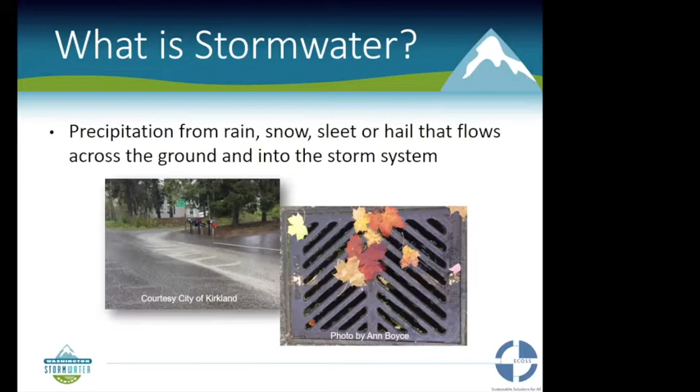First of all, it's really important to understand what stormwater is. It's rain, snow, hail, sleet, whatever, and after it melts, it goes across the ground and into the storm system. Why is that a problem? Well, as it flows across the ground, it picks up pollutants and mostly goes untreated into storm systems, eventually ending up in local water bodies, your local lakes, creeks, rivers, and eventually Puget Sound or the ocean, depending where you're at.

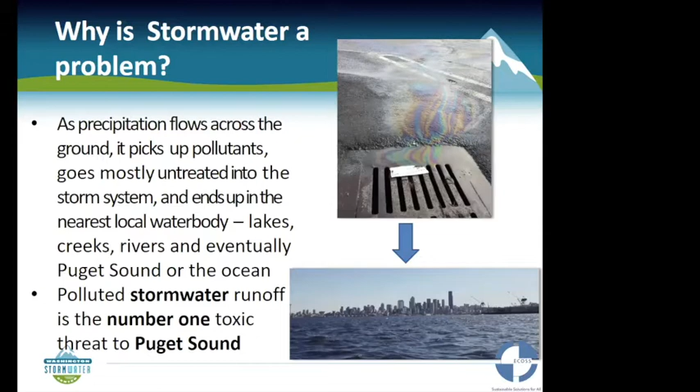Stormwater pollution is the number one toxic threat to Puget Sound, and that's why it's important that you manage your stormwater pollution. In 1972, the Clean Water Act was established to manage stormwater quality and quantity.

You also have issues such as galvanized surfaces, which have zinc in them. We'll talk about that a bit later. And also vehicle and equipment fluids and tires. WSU, through the Washington Stormwater Center, is actually finding out that a high percentage of chemicals in our stormwater come from tires. They're proprietary, so we don't know exactly what a lot of them are, but it is causing major problems for the health of our waterways.

Stormwater is not process water. Process water is things like washing down equipment, washing off fruit or vegetables, those kinds of things. If you have any processed water, that should not be commingling with your stormwater. Wastewater does not either - that is usually directly connected to your sewer system and is treated at treatment plants. And it is not groundwater. So only water that originates as precipitation is what stormwater is.

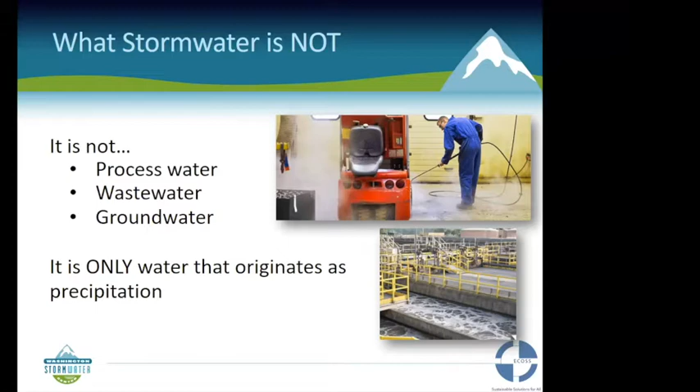Just to give you an example, there's two different systems. There's the municipal stormwater, separate storm and sewer systems, where everything from your homes, from your business, goes to a treatment plant and gets treated. Everything from roadways, parking lots, local fields, your home, your yard, goes into our local storm system, which goes out into our local waterways.

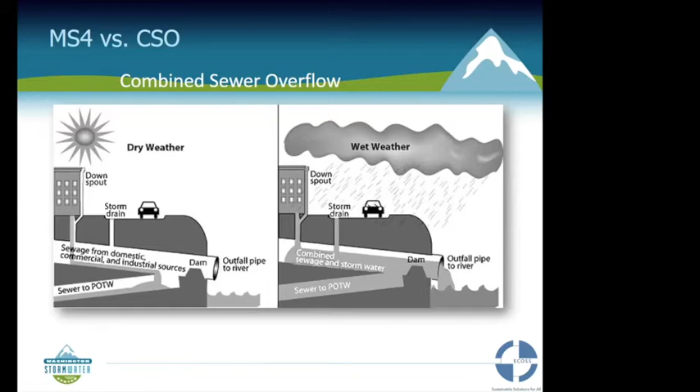There are places in the Seattle area, and some older cities, that have a connected system, called the combined sewer overflow system. Everything from businesses and homes goes to treatment, and the storm system is connected to that treatment also. But when we have large storms like we do these days, it can cause an overflow, which can go out into our local waterways, causing untreated sewage as well as stormwater to impact the quality of our local waterways.

I'm going to show you a real quick video that explains a bit more about stormwater.

Why is stormwater runoff a problem? On the one hand, it's just water, right? But in an urban environment, stormwater runoff is a problem because this is not a forest. This is.

Fall brings rain here. It falls from the sky, melts from the mountains, and runs through our communities. Trees, people, and salmon, from the peaks of the mountains to the depths of Puget Sound, we're all connected by the water that runs through this magical place. When salmon return from the ocean, they bring back nutrients that feed the river and forest ecosystems. From mayflies and trout to eagles and bears, even the trees feed on salmon. They also feed us.

When we built our cities, we weren't thinking about salmon. And when we covered our cities with concrete and asphalt, the rain could no longer soak down into the forest floor. Instead, the rain picks up toxic pollution from the concrete and asphalt and flushes it right into fish habitat. You could see particulates like sand in stormwater runoff. What you can't see are toxics like fossil fuels, plastics, pesticides, metals, and bacteria.

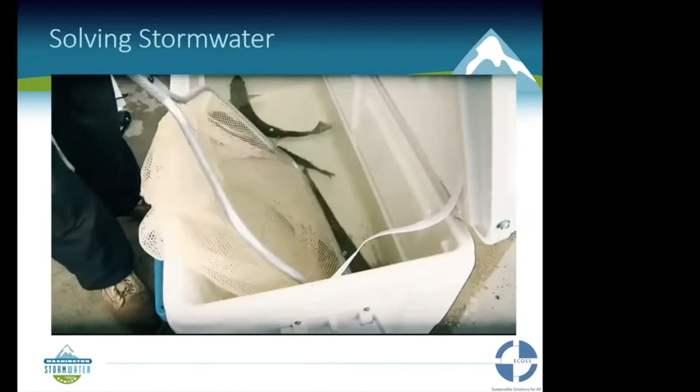Part of our work has been to see how salmon are affected by urban runoff. Coho salmon in particular spend much of their lives in fresh water compared to other types of salmon, and they need cool, clean water to thrive.

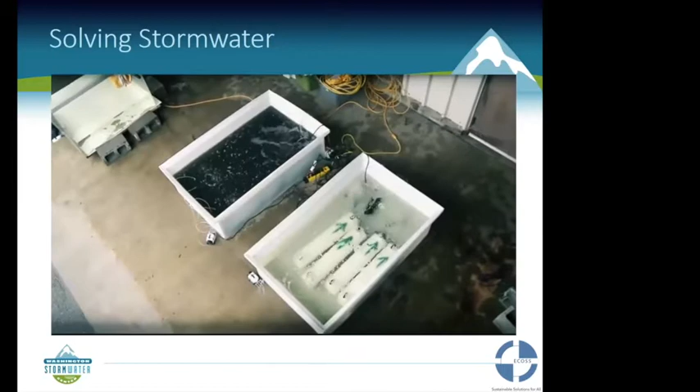In a very simple experiment, we collected runoff from a busy highway in Seattle. Some salmon were placed in clean well water. Others were placed in the collected stormwater runoff. 100% of the salmon in the stormwater died. The fish in the clean water all lived.

So you're seeing 60, 70, 80% of the fish entering that system to spawn are dying before they get a chance to spawn. A normal rate of pre-spawn mortality would be like 1% of the population might die before they get a chance to spawn.

We used to think physical habitat restoration was what salmon needed to recover. We now know it's much more complex than that. Controlling sources of toxic chemical runoff into our urban creeks is crucial to the solution.

After a grueling journey back to their native stream to spawn, toxic runoff causes the salmon to become slow and disoriented. They lose their ability to swim and eventually expire, the females still full of eggs.

And for the few in the next generation that manage to survive, we see effects on the heart, and inside that bubble under the fish is where the heart is developing. Stormwater runoff will cause swelling in that area. That's pericardial edema. And edema happens in humans too, and it tends to be associated with heart failure.

Coho salmon have returned to the Pacific Northwest to spawn for 6 million years. Given the impacts of urban runoff, is there anything we can do to keep them coming back to developed areas?

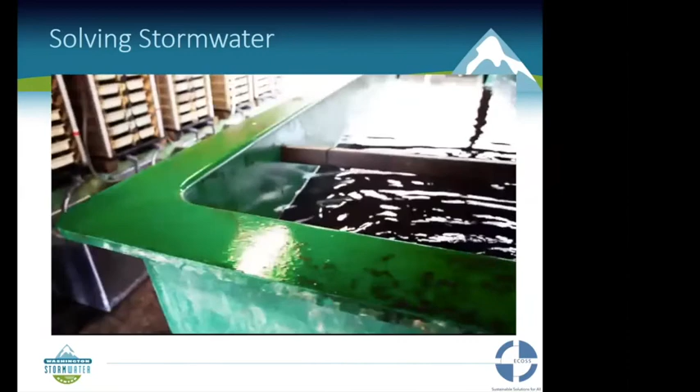The answer is yes. Our research team passed stormwater runoff through a simple filtration system made of sand and compost. We then tested whether the water was still toxic to salmon. 100% of the coho salmon tested in the filtered water survived, every time.

A soil system like the one we used in our experiments is an example of green infrastructure. Using nature as a filter, diverting runoff and using absorbent soils in this way is not the norm, but it is slowly gaining popularity in cities, and we are showing that it can work.

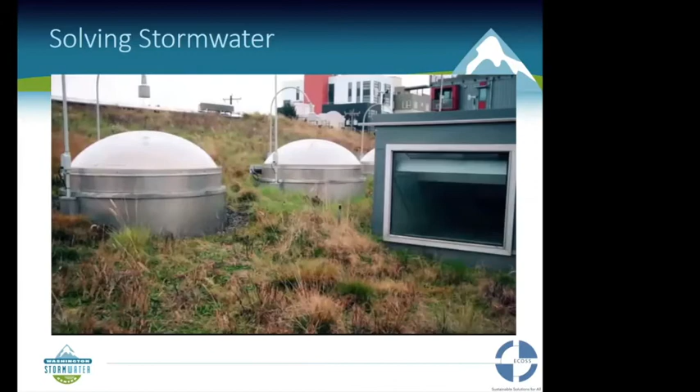In urban areas, green infrastructure like rain gardens and green roofs can act as filtration systems, removing toxic pollution from stormwater runoff, preventing it from reaching streams. This is a message I've been speaking about for some time. No one anticipated the intense toxic response that urban stormwater would have on coho salmon, nor how simple it could be to remove that toxicity.

Really, it's just helping our hard urban landscape act more like the forest floor, letting the rainwater soak into the soil. It's not like we can tear down all of our cities and return to the forest that was there previously, but I think there's a lot we can do. We can go a long way towards helping these systems act more like the forest.

These animals are treasures to us here. Economically, culturally, and ecologically, they are critical. But it takes more than will alone. It takes action. We can't afford to lose these species. Their well-being is an indicator of our own well-being as a species.

We can't go back, but we can do what must be done now to go forward.

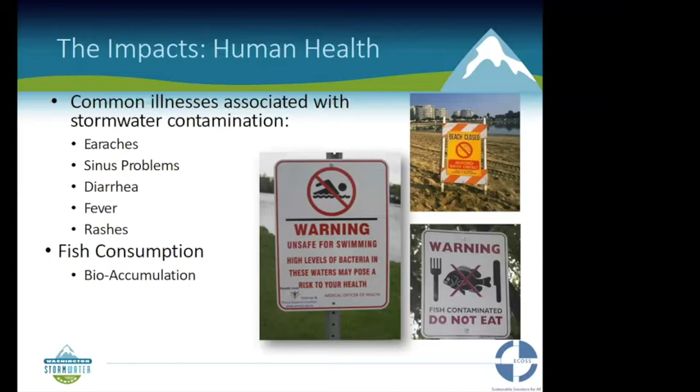It also impacts the economy. Municipalities are having to clean out storm lines and storm drains. They have to pay for public outreach and education and training. They also have to deal with remediation and habitat projects.

As construction companies and developers develop the land, there's stricter regulations dealing with new development, and there's also retrofitting costs for existing facilities. A lot of low impact development like rain gardens are necessary.

As Jen was talking about, there's a high incidence of pre-spawn mortality in urban streams. There are some streams that have 90 to 95% die off before spawning. So that's a huge impact.

It also impacts drinking water. It impacts recreational water use. And it also, as I mentioned earlier, contaminates shellfish.

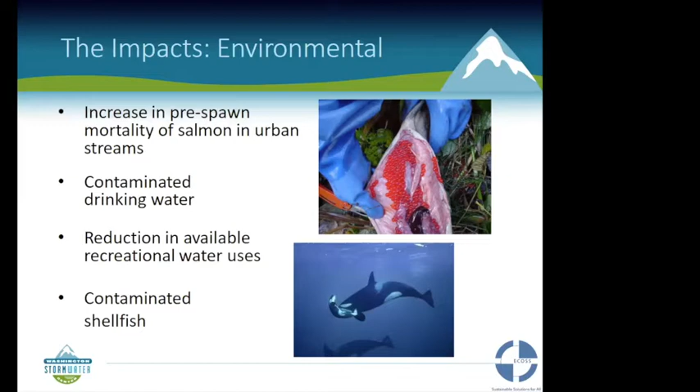And as you're probably aware, it also impacts industries such as yourselves. Stormwater pollution was only recognized recently as a problem, and that's why as we go through...

In 2005, the issues were oily sheen, pH, temperature, and gradually we've added different metals, and we've now started adding PCBs and other things that impact.

So more facilities are required to have structural or treatment BMPs to address that, which impacts your pocketbook. You've also got a lot of legacy pollutants from historical industry, and that is needing to be cleaned up as well. So it impacts your financial bottom line.

So that's the end of the stormwater section. Are there any questions? There aren't any questions. Okay.

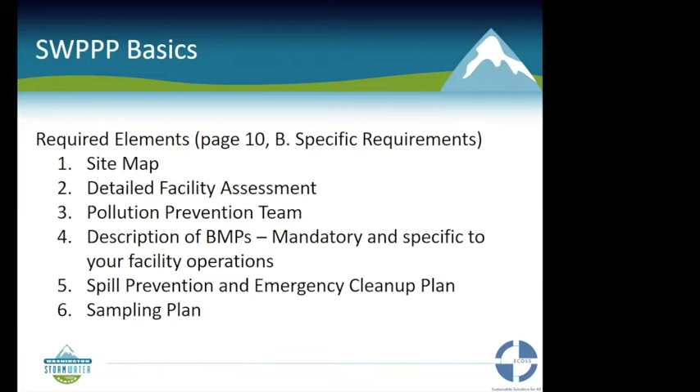So I just want to reiterate that these are the basic building blocks, but your facility is unique. So when you are going through these exercises, please think about your own facility and how you might apply what you're learning today to your own facility.

So what is your stormwater pollution prevention plan? We like to have lots of acronyms, so we call it a SWPPP. It establishes your stormwater management program. It's the basic backbone of your stormwater management permit compliance. It's a tool to help you meet and maintain permit compliance. One of the things we need to keep in mind is that it's a living document, and it has to be kept up to date with any changes or updates to the required elements.

Department of Ecology has a great SWPPP template, and it's a great place to start. It's part of the package that we'll be sending out the link for after the webinar. But as you go through it, you have to make sure that what the permit says is implemented, or change it to be more site specific. Remember, your SWPPP has to be very specific to your facility. Failure to develop and maintain your SWPPP in accordance with the permit is a permit violation, so you need to remember that.

All right, so we're going to talk about the site map and the elements that go into the site map. Please keep this in mind for when we have that exercise this afternoon.

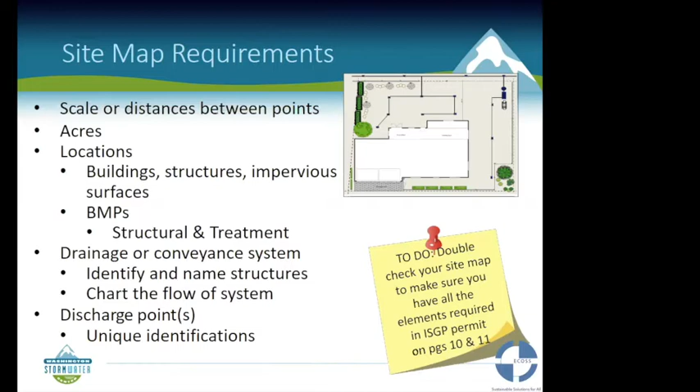Let's talk a little bit more about your drainage and conveyance. You want to locate inlets and outfalls—all your catch basins, all your downspouts, surface discharge. Are your downspouts a surface discharge, or are they piped directly into the stormwater system? Any area where stormwater will infiltrate, you need to mark that. Determine the location of your outfalls and where runoff and run-on might affect your property—anywhere your stormwater leaves your site, but also where your neighbor's stormwater might come onto your facility. You need to know, in a rain event, the surface stormwater flow direction and how it flows, and the location of surface waters in the vicinity. So if you have a wetland next door, or a river or creek nearby, you need to mark those as well.

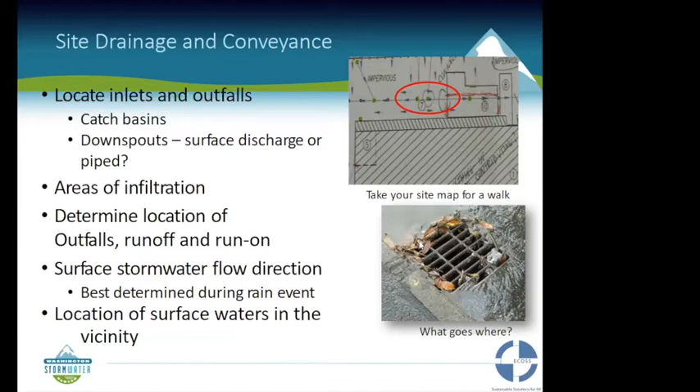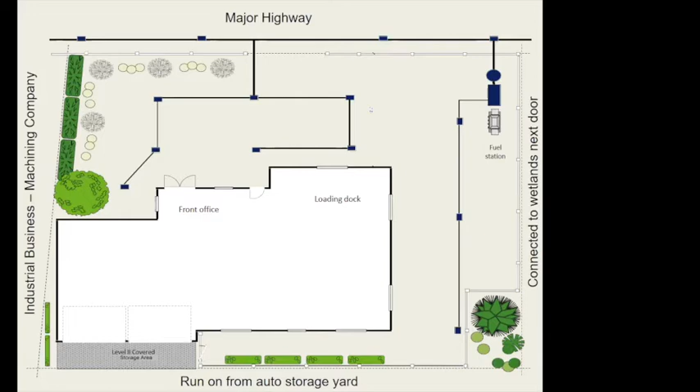Okay, so you note the distances, so the distances from the buildings, etc., and make sure that those distances are accurate. Go ahead and go to the next one.

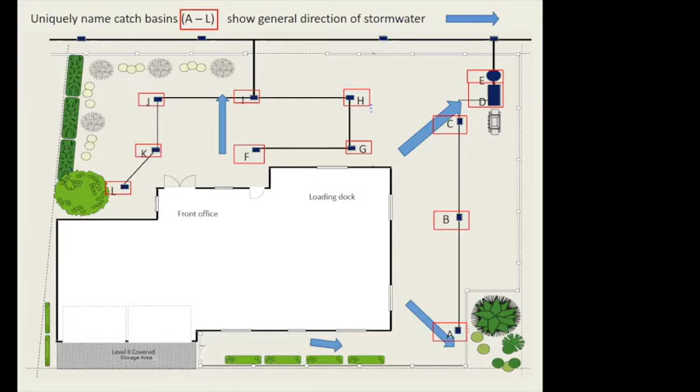You want to show the general direction of your stormwater flow. As you can see in this, the blue arrows are showing where the stormwater is flowing. And if you have some problems, like it looks like some of the flow may be in the lower right corner, maybe bypassing that catch basin and flowing into the wetland, you need to make sure that you berm that area to make sure you're not affecting that wetland.

So the other things you need to identify, not only those pipes and catch basins, but any sheet flow and any run-on areas of concern that may have pollution sources other than just stormwater, like the fueling station, and where that outflow is.

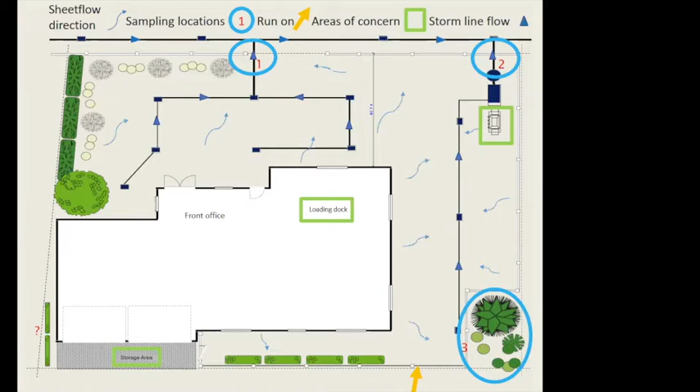Show where your stormwater leaves your property. We talked a little bit about this. If your stormwater is leaving your property inappropriately and affecting other facilities, you need to be aware of that. Making sure that it's not going into inappropriate places like the wetland, that's all important. It needs to be on your site map as well.

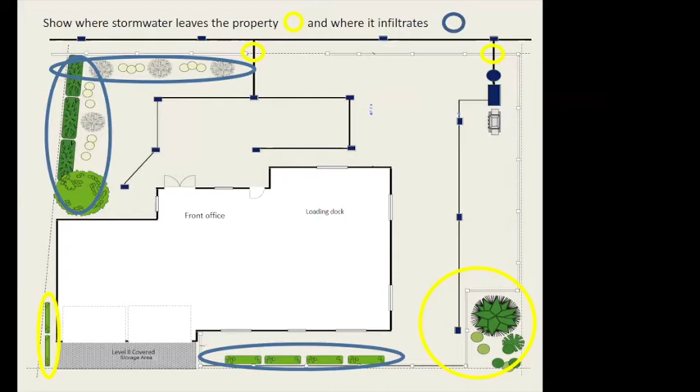So we talked about the site map. Please think about your facility when we go through the facility assessment.

This is required element 2 of your SWPPP, and the facility assessment is a description of your facility and your industrial activities. So what you'll want to do is take an inventory of facility activities, all of the equipment and materials that could cause you to have pollution problems.

So anything that's a source of pollutant, you want to note those and potentially, if you can, eliminate those. But you want to make sure that your facility is thoroughly inspected so you know where those areas of pollution runoff might be a problem.

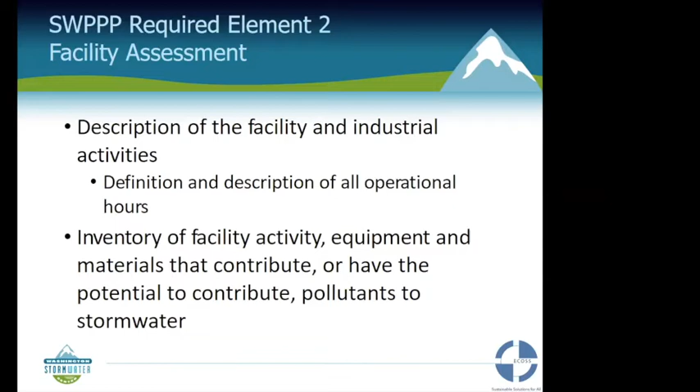So you assess your facility for sources of pollution. Sometimes we look at things so often that we don't really see what's happening. So put on your new eyes for inspecting your facility and making sure that you really look at things with an eye toward what could cause pollution in your stormwater runoff.

So those things might be obvious things like fuels and solvents and coolants and how you store those. It may be your raw product or your final products that you store outside that may be causing pollution problems. Scrap metals and products that are metal. Any chemicals that are stored outside could be a problem.

Many of these are sort of obvious, but making sure that you're really looking at them with that eye. Again, you might have, like in the lower picture, a pile of galvanized materials outside, and you see it every day, and you don't think of it as a pollution source, you think of it as part of your product or part of your facility's raw materials. So looking at things with the inspector's eye of stormwater is going to be really important.

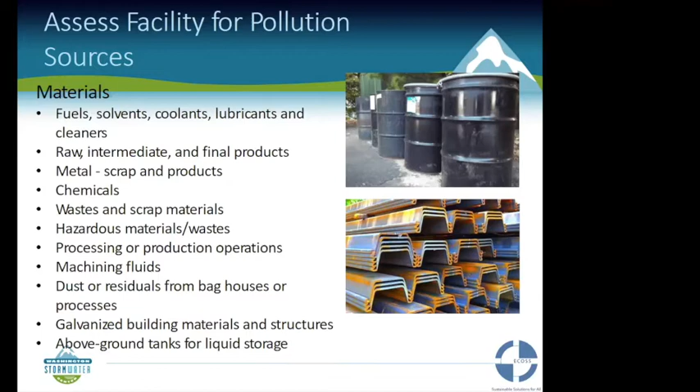All right, so high risk activities. Loading and unloading of products. Again, making sure that when you unload products, if there's potential for spill or material getting into the storm drain, you need to make sure that you are managing that.

Vehicle and building equipment washing. Remember Anne talked about what is and what is not stormwater. This is one of those things that we need to make sure we are remembering only rain down the drain. So if you're washing your vehicles outside or your building or equipment, that needs to be managed separately from your stormwater runoff. So that cannot go in the storm drain. That is not stormwater and can be a violation of your permit.

Landscape and maintenance areas. I often see people that have recently landscaped and the bark or new soil is left to run off into the storm drain, that can cause you a turbidity problem. And that could be something that is easily fixed.

Outdoor storage of drums or containers, you need to make sure that those are managed properly. If you're loading or unloading anything from those containers, make sure you don't spill. And again, pressure washing, that is also not a stormwater activity, that's a wastewater activity.

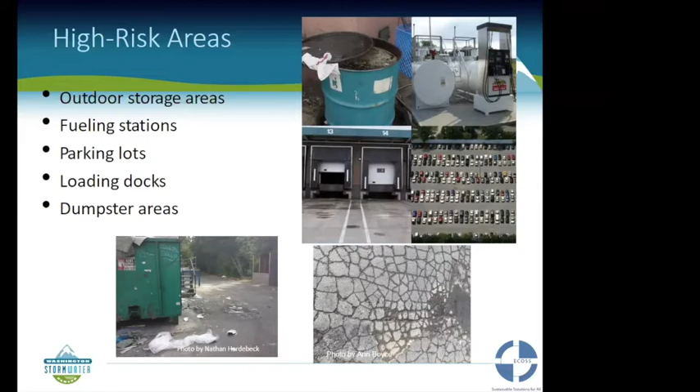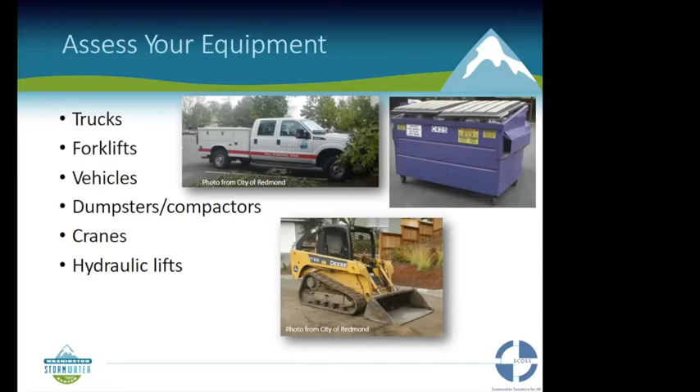It's actually required as part of the mandatory BMPs in your permit that you keep those dumpsters closed unless you're adding material. So assess your equipment. Make sure the equipment on site, even fleet vehicles, your bulldozers, any forklifts, are maintained properly. Not only could there be drips and spills from those pieces of equipment, but if you are doing any kind of maintenance outside, that could cause pollution problems as well.

These are things we don't think about very often: our buildings themselves, roofs, siding, HVAC systems, and downspouts. Those are often a source of zinc pollution. So you need to think about whether your roof is a galvanized material, whether your downspouts are galvanized, and make sure that even if your roof material isn't a problem, there could be flashings or HVAC systems that are galvanized, causing an exceedance of zinc.

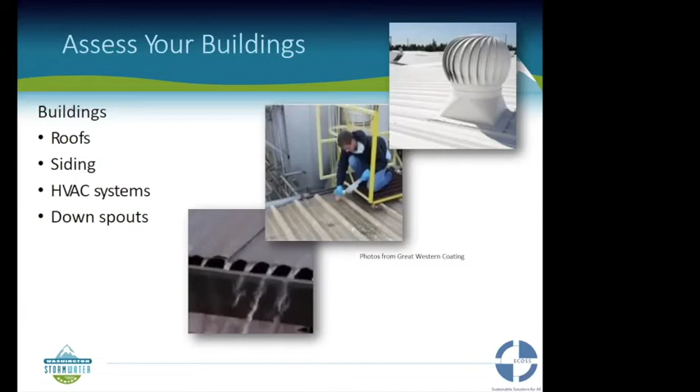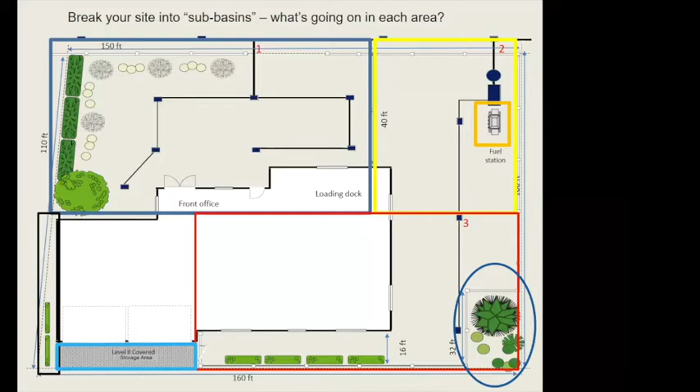Your pollution prevention team. This is also very important.

I apologize profusely, it looked like we were supposed to have a break. Anne, can you address that? I think we don't need a break, right? I'm looking at the agenda, I apologize. Lauren, can you unmute Anne? Keep going, it's almost there. Okay, I apologize. Okay, thank you so much.

So the SWPPP requirement element 3 is your pollution prevention team. There will be times when the person responsible for managing your stormwater is not available, and times when you need other folks to help with stormwater management. So you need a list of folks who are available and able, who understand the permit, know your SWPPP, and know how to respond to an emergency or do inspections while you're not there.

So you need to list the names, phone numbers, and emails, who the team lead is, how to contact them, all of their contact information, and maintain training documentation for each team member. Every year you need to train those folks, and we'll talk about training a little later, but they need documentation showing they know the SWPPP, your BMPs, and any management issues you may have on site.

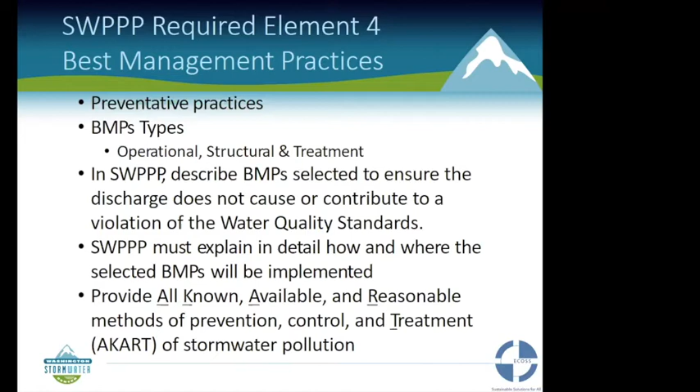So the first grouping is your operational BMPs. These are your good housekeeping, preventive maintenance, illicit discharge detection, spill prevention, employee training, and your inspections, reporting, and record keeping. First, your good housekeeping practices are those things you do on an ongoing basis—daily, weekly, monthly, quarterly, and annual—depending on the need and your requirements.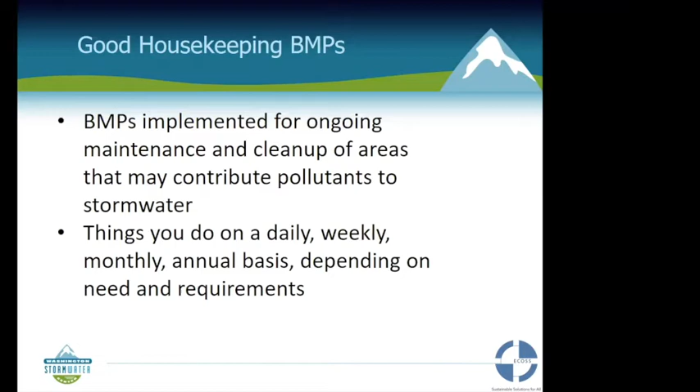One of the biggest ones is going to be your friend, sweeping. You need to do it once a quarter. Hopefully most of you are aware that September 1st—it used to be that the first flush event was October 1st and you needed to sample that first flush—has been moved back to September 1st. That means you're getting it at a time when, in July and August, you've had a lot of dust and metals and things accumulating on your surfaces. So I would encourage you to schedule a vacuum sweeper towards the end of August so that you're ready for that first flush event in September.

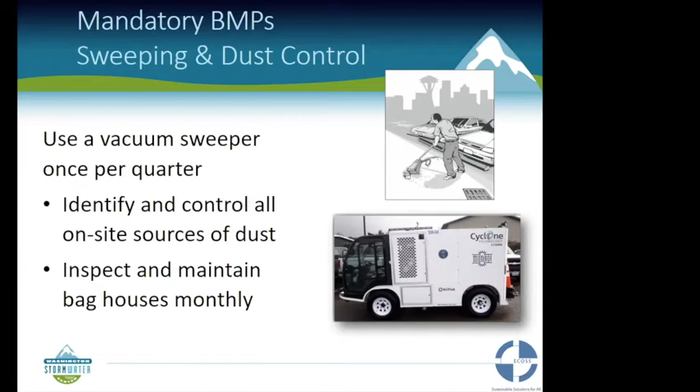Another one is your dumpsters. You need to have them covered. They should be resistant, have a resistant lid. They should not leak. In fact, it is mandatory, or supposed to be anyway, that your waste management company replace those if the lids aren't working properly and/or they're leaking. You want to clean up spills and garbage immediately and not let that accumulate. And tarps are not considered storm resistant.

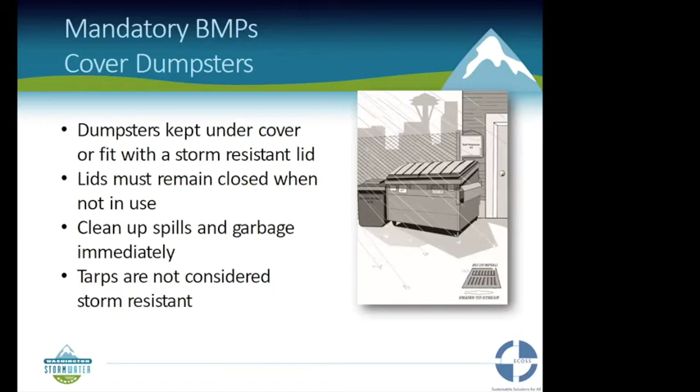For preventative maintenance, you want to describe the BMPs you're going to use to inspect and maintain your stormwater conveyance system, and identify all your equipment and materials that could cause problems and contribute pollutants to stormwater. Your mandatory BMPs include pond maintenance, vaults, and oil water separators, in accordance with ecology stormwater manuals.

I want to note that a lot of times I talk to businesses that have oil water separators and ask when they've last maintained them. They say, oh, you're supposed to maintain them? Most of the time, the requirement is to maintain them at least once every 6 months—that's pulling them apart, cleaning them out, and putting them back together. Be careful though, because sometimes if they don't put the plates in correctly, it doesn't help you.

One note on pond maintenance: it's incredibly important to keep your as-builts for future reference. You do not want to be in a position where you have a pond and don't know if it has a liner or not, because that first shovel that breaks through the liner is going to increase the cost of your pond maintenance tremendously. So make sure you keep your as-builts.

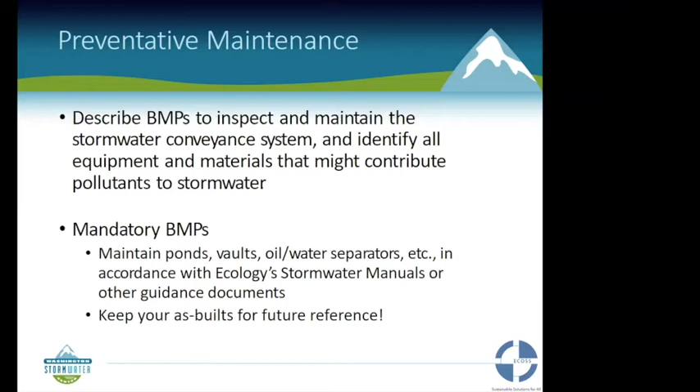You want to inspect and maintain your storm systems, including your lines as well as your catch basins. These need to be done on a regular basis. Municipalities often say to clean your catch basins at 60% of sump or 6 inches below the outlet, whichever works. But you may want to do that more often, because if you have a large amount of sediment in your system, it can impact your water quality sampling results.

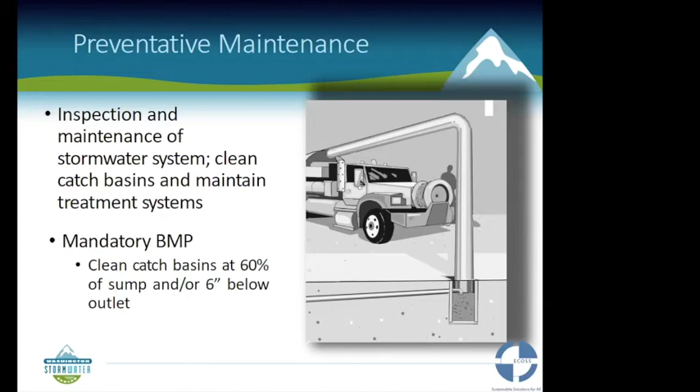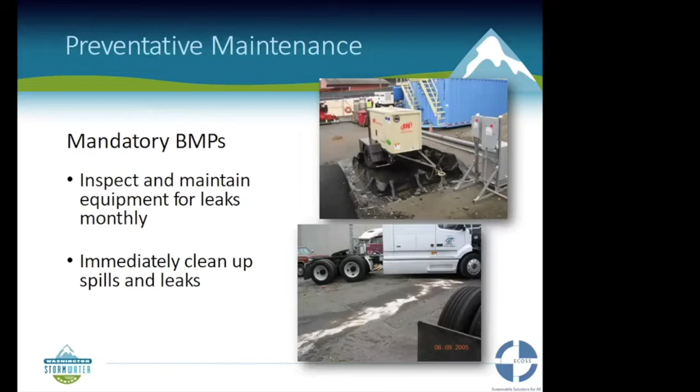You want to make sure that if you have any particular equipment that might leak, you check those for leaks monthly. You should separate leaking equipment into an area that won't impact your stormwater until it's fixed. You also want to clean up leaks and spills immediately, and you should have a team that can address that situation.

Illicit discharges are another thing you need to be careful of. Make sure you don't have any vehicle or equipment washing, steam cleaning, pressure washing, or other activities considered process water going down the storm drain. That needs to be separated—it should go into a sewer system.

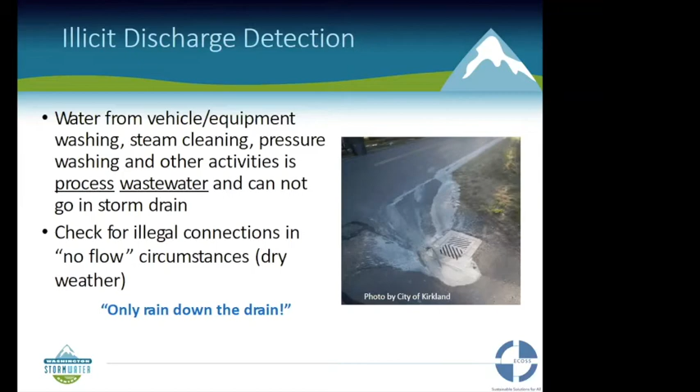You also want to, during the dry season, take a walk on your property and make sure you're not hearing any flowing water. There should be no flowing water during the dry season. If you're hearing it, that could be a connection either from your building, from another property, or from sewer. It could cause you some major issues.

There's a difference between the SPCC, the Spill Prevention Control and Countermeasures Plan, and the SPECP, the Spill Prevention and Emergency Cleanup Plan. You are required to have an SPECP regardless of whether you have an SPCC or not. The SPCC is for above-ground storage tanks of 1,320 gallons or 42,000 gallons below ground, and it's just about oil—they need to have a stamp from an engineer. Your SPECP does not need an engineering stamp, and it needs to address all substances that could cause pollution to your stormwater.

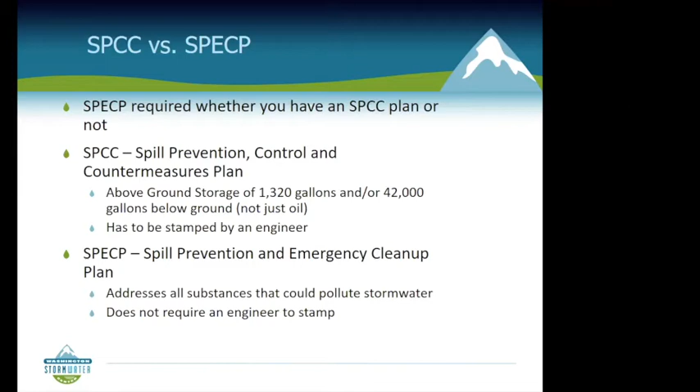You want to have secondary containment. You need BMPs that prevent and clean up spills, spill control, and spill cleanup materials such as pads, socks, and booms. You want to know how you're going to dispose of your contaminants and control those.

You should replenish all your spill response materials, and you can put a mark on your spill kits such that if they're not lining up, you know somebody got in there—or put an easy breakaway zip tie on your spill kits so you know if it's broken, somebody's used it. You need to inspect that on a regular basis to make sure you're prepared when a spill occurs, and people should let you know if they use it. Don't be surprised—you should not be getting surprised.

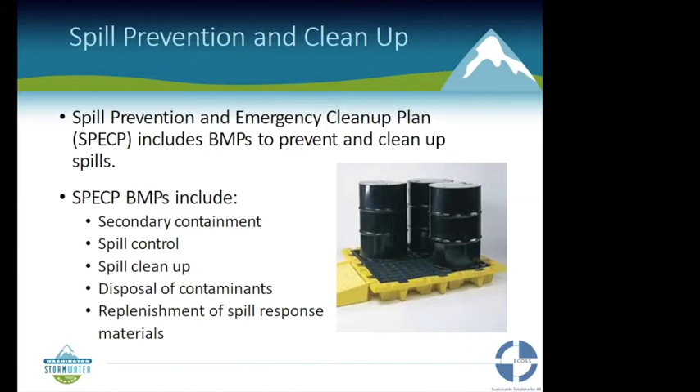One of the things you can do is use berms on your site or building. You can use them to cover exits so that you can use your building as secondary containment. You also want to plug your drains when you're doing fueling, to make sure that if you have an incident, it doesn't go down the drain and you can capture it.

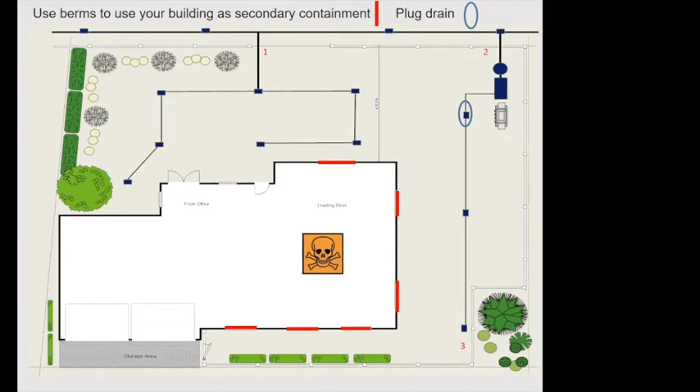An easy way to do that is to install a thick 6 mil plastic bag underneath the storm drain lid. That allows you to create an inexpensive, easy to apply plug that's also easy to remove.

You should have a group of spill response personnel. They need to be identified in your SWPPP, and you should have a training schedule. I encourage you guys to actually have a demo.

One of the things that I do for businesses is provide a demo using both universal and oil-only spill kit materials. It really helps.

Hit home how you want to use different types of materials for different types of spills. The oil only, of course, would be used for oil-based spills and is really helpful when it's raining or there's water on the ground. It will absorb the oil and leave the water. So if you got a spill inside your storm drain, you could literally toss the oil-only pad into the storm drain to soak up oil.

Whereas if you tossed a universal pad in there, it would soak up all the water and sink and not do you any good. An example was I got a call in the middle of a massive rainstorm and they'd had a hydraulic leak and they couldn't find any oil-only spill kits.

And they had used all the universal kits. They pumped out all their water into a container just to contain the oil. And they did find an oil-only kit. It was an old one, but it still worked. So it's really important that you have the right tool for the job.

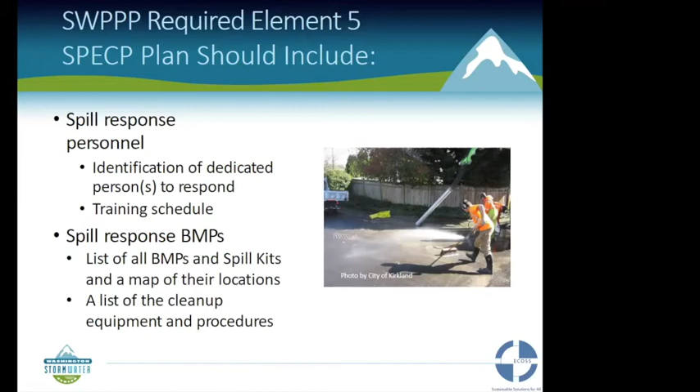And you also want to have a spill prevention and cleanup plan. This plan should include your business contact information, who should be called on site, your business owner or site manager, who should be called for the spill cleanup as the spill cleanup coordinator, also the municipality spill hotline, and the Department of Ecology spill hotline to report.

You should also have a list and acknowledgement of all the activities, equipment, and materials that could cause problems.

The spill kits should be located within 25 feet of fueling areas, including mobile fueling. So if you have a mobile fuel truck, you want to have a spill kit on the mobile fueling truck.

You should have sorbents for at least 15 gallons of fuel. You should have a storm plug or cover. As I mentioned, you could use a 6 mil bag that with a storm drain pull, it's relatively easy to implement and plug the drain.

You should have containment booms of at least 10 feet long and able to absorb at least 12 gallons. A non-metallic shovel to deal with things, and 2 5-gallon buckets with lids to put any materials that you use to absorb any spills into if there is a spill.

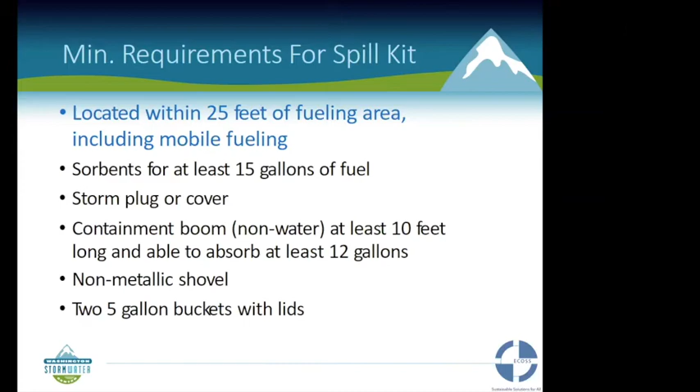Here's an example of how you can set up locations that you can put your spill kits so that you can have a map showing where they're all located. If there is a spill, people know where to go to respond to a spill.

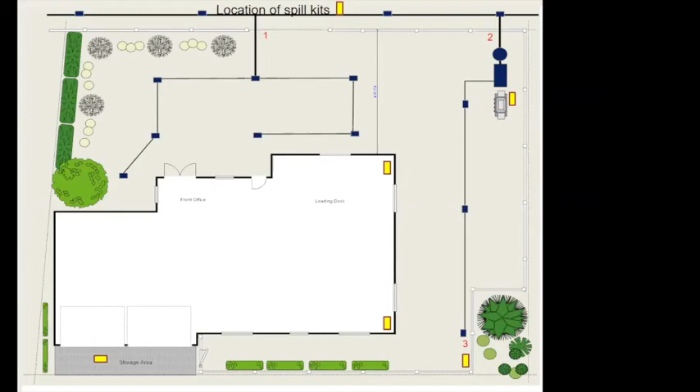You want to have employee training on an annual basis and all new hires so that even if they're a new hire, they should know how to respond. You want to incorporate it in safety meetings. You can do this on a regular basis, maybe even just have some questions or quick tidbits that you can share about things.

As I said earlier, do a practice run, get some hands-on activity, buy a kit that you can just replenish that you can demo with so that people can see how to do it. It's great to do in small groups and people really enjoy it.

I usually do have 1 drain, 2 bottles of colored water, and an oil kit and an oil only kit and a universal kit on either side of each stream. And then I have 2 people pull the lid and place the plug, 2 people respond with the oil only, and 2 people respond with the universal materials.

It's a great opportunity for some hands-on activity and people really enjoy it. And they also feel empowered to respond if there is a spill.

You want to go over the SWPPP, as Lisa mentioned. Be conscientious of the language gaps. As I said earlier, the permit and the SWPPP, they're like foreign languages. So make sure that you come to a layperson language, so that everybody can understand what you're trying to say.

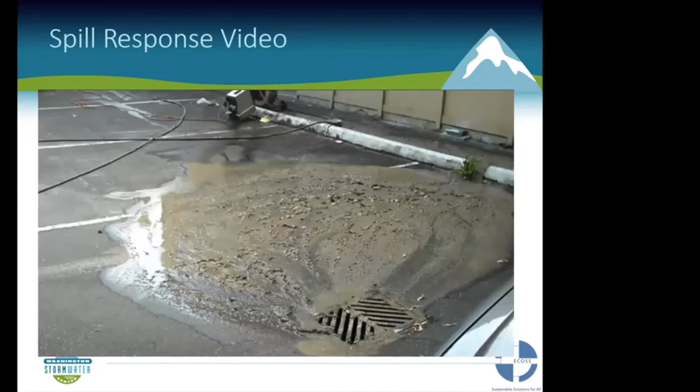Number 2, recognize and evaluate the spill. Evaluate the situation and select which type of spill kit would be best to clean up your spill. Be sure to put on the protective equipment found inside.

Number 3, stop the discharge. First, stop it at the source to make sure it does not continue to spread. There isn't a single way to do it. All spills are different, and sometimes it requires getting a little creative and using equipment you might already have on hand.

Number 4, protect the drain. John uses the supplies in his free spill kit to block the storm drain, which keeps pollutants out of the system and gives him more time to focus on cleanup. Keeping pollutants out of the system will save John a lot of money in cleanup costs.

Remember, if a spill reaches the storm drain, notify Seattle Public Utilities right away by calling 206-386-1800. Number 5, now it's time for John to clean up the spill.

Here we see him using the booms, throwing them downstream of the spill's flow to stop its spread. He uses pads to soak up excessive liquids from reaching the storm drain. After you've saved the day, make sure to dispose of used materials appropriately. If you aren't sure how, call Resource Venture for guidance.

Number 6, evaluate and refill as necessary. Take steps to make sure the spill won't happen again. It'll save you time and money in the long run. If you need more materials, order them now so you'll be ready if a spill does happen.

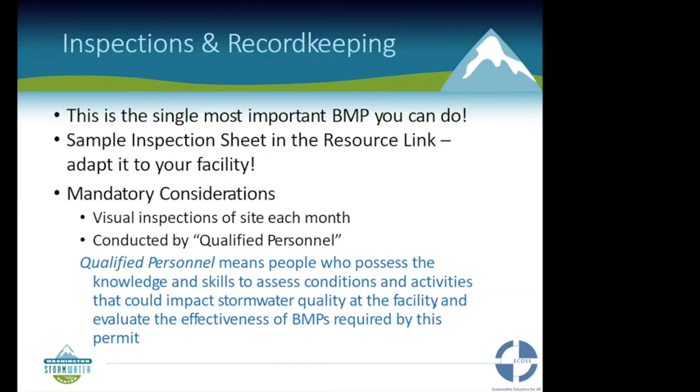You want to have multiple qualified personnel. As I mentioned earlier, you want to have backup. If you are the main stormwater permit manager, you should not be alone. You should have somebody there so that if it's raining and you're not there, they can sample for you. You want to make sure your managers understand what you're up against, and these kinds of trainings help them understand that.

You want to customize your inspection reports for your facility. Check your files periodically at Ecology and make sure that they have all the documentation.

You want to over document, but you don't necessarily need to submit all the documents. This may be for your own reference. You want to use a camera. Again, you don't necessarily need to submit them to Ecology, but it helps you and your staff manage your property and be well organized. Make sure that if you have documentation, it's well formatted so that people can easily find it. It shouldn't be stuck in a box in the back room someplace. It should be in a file drawer where people know where it is, or in books on a shelf.

Okay, the next type of BMPs are structural BMPs. These are physical, structural, or mechanical devices or facilities that are intended to prevent pollutants from entering your stormwater. You need to include structural BMPs listed as applicable in Ecology's guidance documents and manuals.

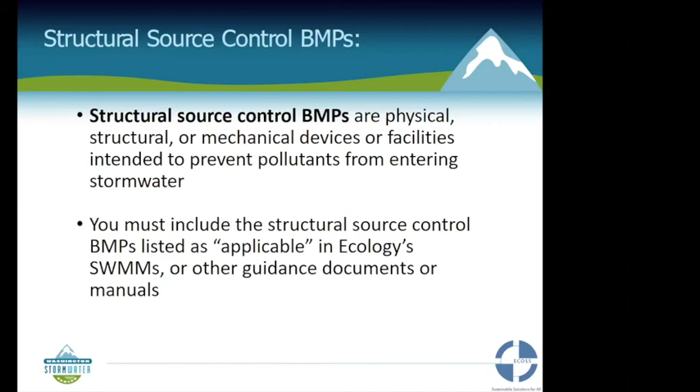Some examples of structural BMPs include a roof structure that covers areas that would be impacting stormwater if they were affected by rain, and also things like covering your alligator pavement. A lot of times with alligator pavement, it's collecting material when it's dry. So when it rains, those materials are lifted out of those cracks and transported across the surface of your property into the storm drains. By covering them, when you do your sweeping and things like that, it will help keep your stormwater sampling in compliance.

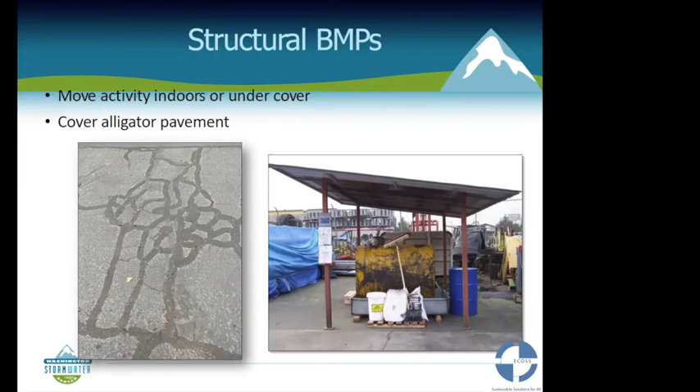Some additional structural BMPs are things like berms, walls, barriers, spill pallets, decks, tanks. These are all really important structures, and they need to be inspected to make sure they're not leaking, and just making sure that they're working properly.

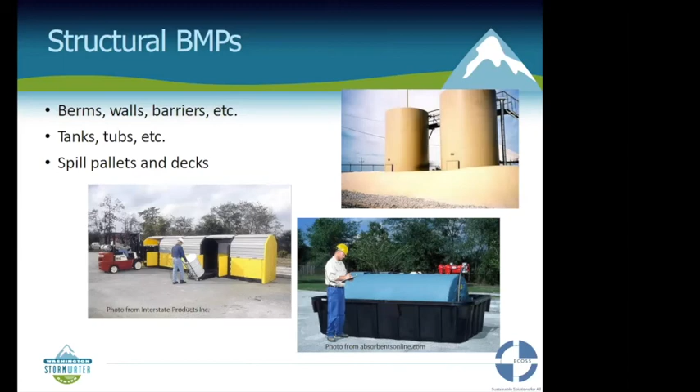Additionally, we were talking about your roofs, siding, drain pipes, fencings, etc., that can impact your stormwater, especially galvanized metals that have zinc. Often by coating these materials, you can almost eliminate that zinc overnight.

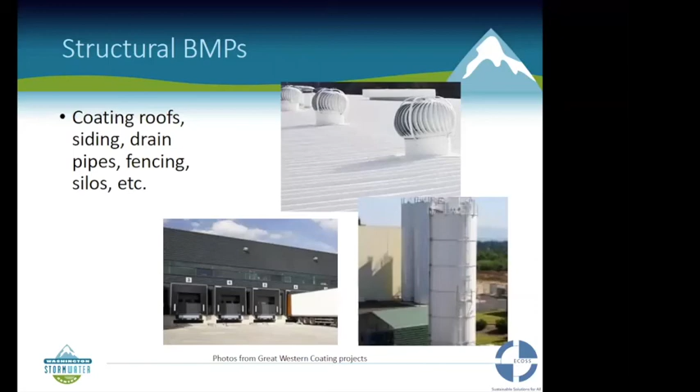The third category of BMPs is called treatment. That's where you've done everything in the operational and structural categories first, but sometimes it's not enough. That's when treatment BMPs come in. They're intended to remove pollutants from the stormwater. It's required if you hit a level 3 corrective action, and we'll talk about that in another section. You must obtain an Ecology approval before beginning construction or installation of treatment BMPs.

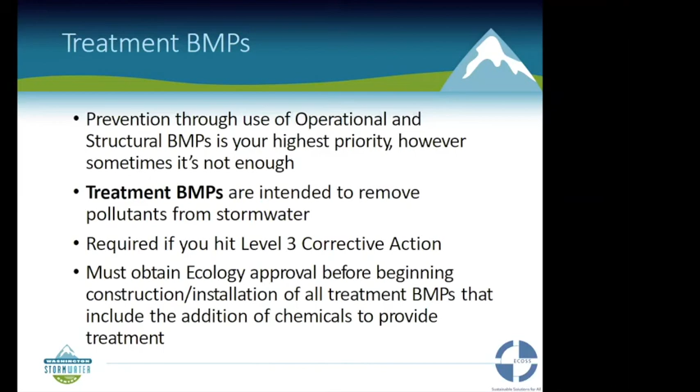Okay, I'm going to take a quick Q&A section here if there's any questions about what I've just covered, and then we'll go into the mapping exercise. I'm not seeing any questions. I'll move on to the facility exercise then.

So what we wanted to do was provide you an opportunity to take an example map so that you can potentially apply what we're going to talk about today to your own facility. So we've created instructions here. You should also have a facility description and assessment of your facility Word document, a one-page assess facility for pollution sources Word doc, and 6 maps: 5 that deal with the facility description, and 1 that you'll look at and do a facility assessment. It's also good to have either colored pens or pencils to draw with so that you can color code things.

You're going to review the maps associated with the facility description and compare the list of SWPPP requirements for the site maps. Identify and add site map requirements that are missing. A few icons on the map that are not necessarily noted at the top of the page are your storm drains, which are those rectangular blue squares, the storm lines, which are the blue lines, and an oil water separator.

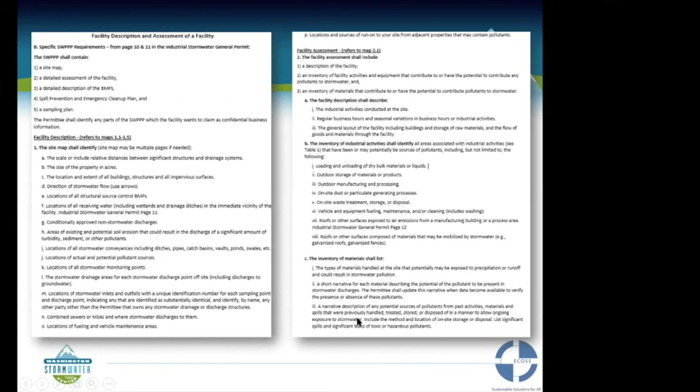The other thing you're going to do is assess your facility for pollutant materials. I've broken these down, and it's not necessarily a complete list because every site is different, but these are some major things: the materials, activities, equipment, and buildings that will impact your storm water quality.

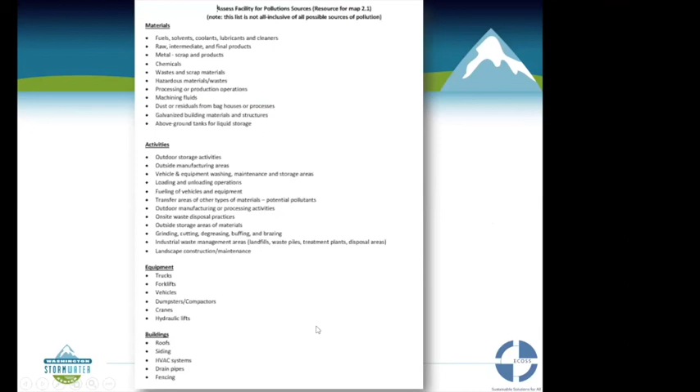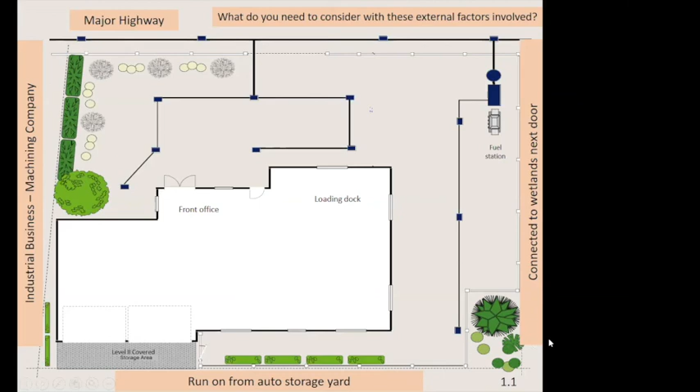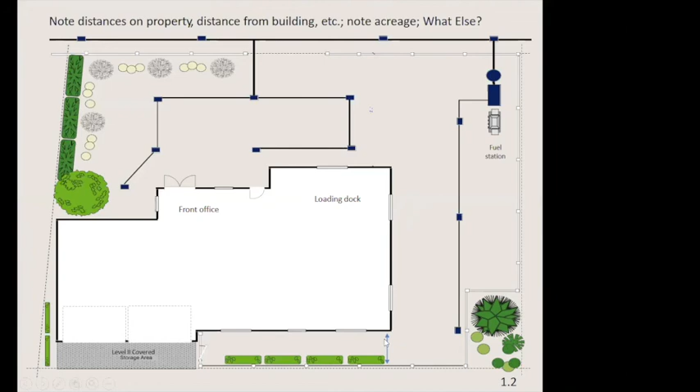This map, 1.2, you want to note the distances on the property, like from end to end, side to side, from the building to the edge, perhaps the distance to the closest storm drains, those kinds of things. You want to uniquely name each storm drain, and also note what general direction the stormwater flows. What else could be put on this map?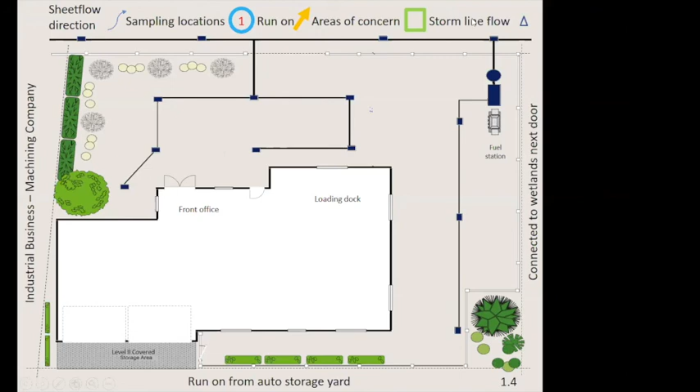You want to show direction of sheet flow, sampling locations, run-on areas, areas of concern such as a fuel station, and storm line flow. You want to show where the stormwater leaves your property and where it infiltrates.

And finally, map 2.1, what you're going to do with all that information you've got about your site. Here's what's going on your site: you've got unpaved areas, alligator pavement, metal and drums, run-on, run-off, tires, etc. What BMPs are you going to implement here?

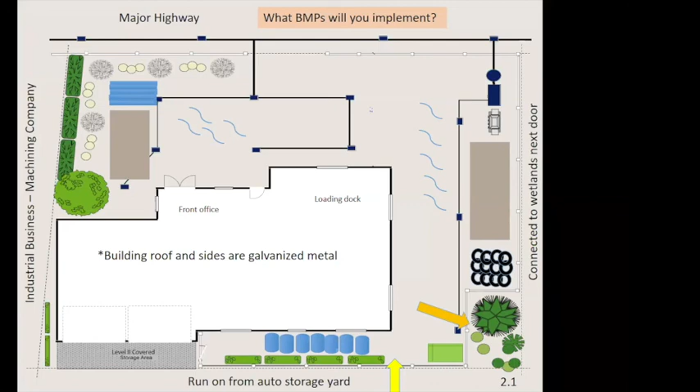I did see one question for the exercise. Are there any additional ones? Let's see if we can answer it. So there is one question about the exercise: are we supposed to adapt these maps to our own buildings as best we can?

Yes and no. Our thought was that this is an example site to get your thought processes flowing as to how this kind of information applies to your site. So this is just an exercise, and we wanted to come back and talk about it as a group. But yes, you should take these considerations and apply them to your own site at another time. One thing you can think about as you go through the exercise: what's going on at your site? How can you implement BMPs that would address certain things going on? Great question, and I really encourage you to think about your own site as you go through this.